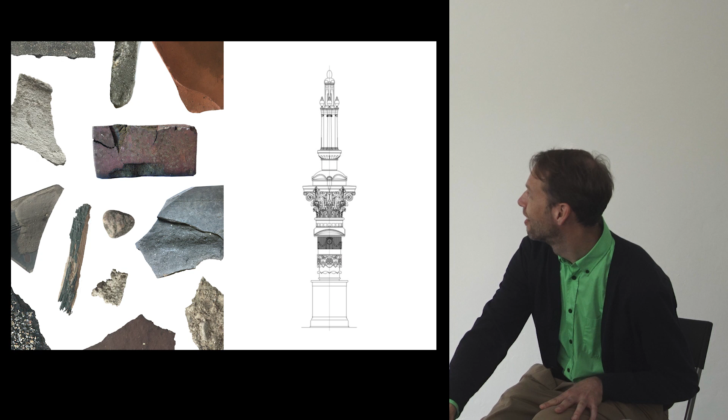And for us, that means... better carry on, is that the sign to move on? For us, it means that we need to be flexible in how we look at things and how we engage with things, and we need to be agile in how we condition the situations for our architecture.

For me, it means also to develop an attitude to enhance an empathy, a sympathy with the world around us, to engage with the world around us as a material and also as a renewable energy, and not in an esoteric genius loci way of finding spirits of a site, but dealing with the actual matter in a pragmatic and sustainable way. And people have been doing that for quite a long time already.

Maybe only since historicism in the 19th century came up, there was suddenly a shift between old and new. But before that, things were seemingly merging much more into each other. And people like John Soane, whose work we see here on the right, turned that into a real sophistication.

This is the pasticcio in John Soane's museum in London, which is made from found pieces, from things he collected, but also from new parts that he assembled together to a giant column and order of quite different things.

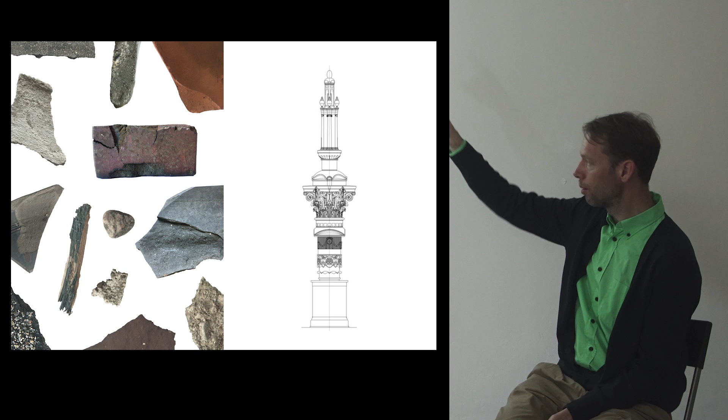I will come to that material later. This is the actual material of one project that we're doing in Garkau.

And there was a culture of accepting mistakes. And I think for us to engage, for all of us to engage with what is around us, that's one of the first steps to make, is to accept what is there, but maybe also to accept and to accomplish a mistake and something that is broken.

Composite orders also mean a social energy, something that sets free new space that can be occupied in different ways.

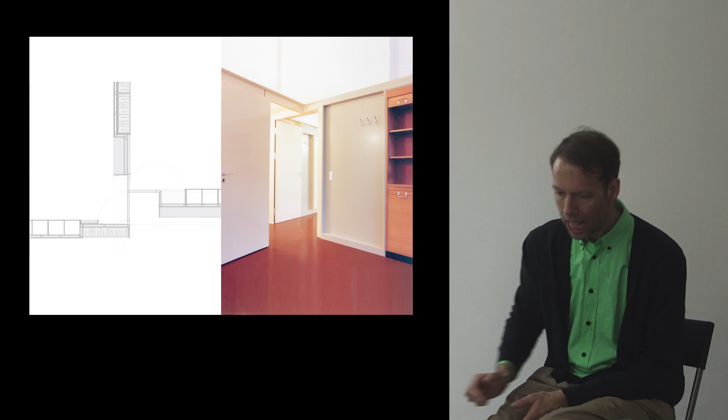And this is the first project that I have done as a student. That's now almost 20 years ago at the Art Academy in Hamburg. And in a way, it captures some of these ideas.

It's, do we have a pointer? Or? Sorry, yeah.

On the left in the plan, you see some cupboards, and those cupboards were collected from the school, from other places. The only thing that we designed is this knuckle at the center, which is a special door where 3 door leaves merge into one.

Those secretaries of those offices weren't best friends, so they didn't want an open office, but we tried to make it open as possible. So we have this door leaf that actually joins all 3 rooms together into one when the doors are open. That's the main thing that we designed, reaching out and embracing those found cupboards.

Around those themes, I want to show 5 projects, smaller and larger. Because teaching is an important part of the practice I'm running, the first one is a student project that is actually also quite old already, but it's still one of my ever favorite projects. I think it's from 2010.

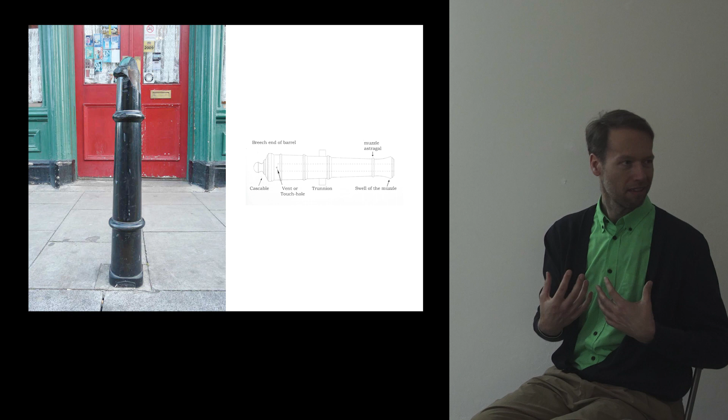It's when I was teaching in London at Kingston University, and the topic of that year was public house, which is basically about pubs. It's a connection that I didn't know or became only aware in London, that pub actually means public house. So it's a public space, it's a public living room, because flats are small in London.

People meet in the public house, and that's where they have parties, that's where they have dinner, that's where they drink beer. They wouldn't do that at home as much as we do it here on the continent. That's why the public houses are a real social condenser.

At that time, the smoking ban was introduced in London. So we asked the students to design small armatures in the public space in front of the pub to bring the life out on the streets.

One of them, Lydia Grinko and Minsu Kim, they found this bollard. This bollard is on the pavement in front of the entrance door, and it's in itself already a really interesting piece of transformation, because in its former life it was a cannon used in the war. It has then turned upside down and was introduced to avoid cars hitting people.

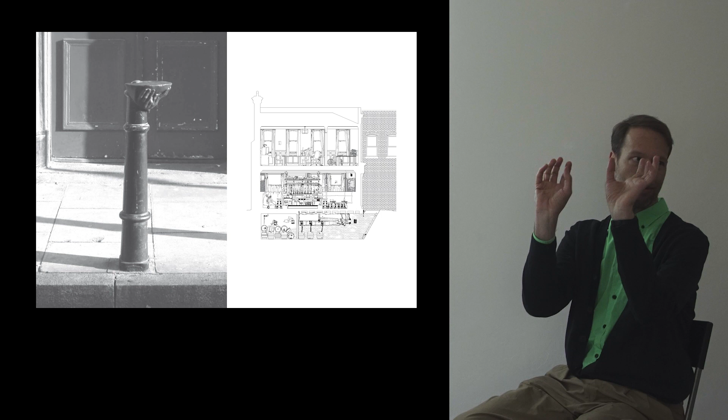So it has a quite nice second life, and now the students came and gave it a third life because they noticed this broken head and they wanted to repair that, but also turn it into something new. To engage with the furniture inside the pub, they made a negative of the top of the bollard, and made a counterpiece. Here we see the bottom of that counterpiece that was then to be inserted onto the bollard. When it's finished, it looks like that, and it actually makes a little table held up with the students' hands that they've also casted from their real hands.

So it's also a hint to Greek caryatides, but actually all done in English steel cast iron. I think it's a very meaningful but also thoughtful piece of how to make something sustainable, but also something festive and something sociable with what we find in the city.

At the moment, we are working on a project that has been growing more and more over time. It started quite small, and it's now turning to become a little village on the countryside where we're repairing and transforming things. I call it Repairing Häring. Häring is the name of the architect, Hugo Häring. This is him on the left.

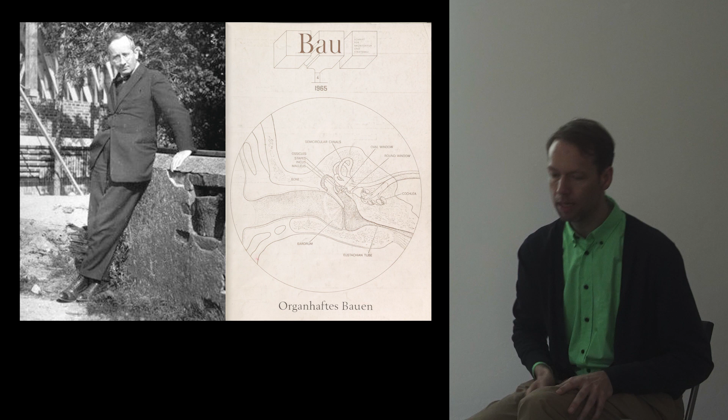Hugo Häring is one of the superstars of the 1920s in Berlin, together with Mies van der Rohe and Taut. He was sharing the studio with Mies van der Rohe. But his ideas were quite particular, I would call it, and maybe not always so popular, especially with Le Corbusier.

He had big fights with the CIAM congresses and with Le Corbusier, and at the end he was pushed out. That maybe wasn't so useful for his career, but indirectly he influenced the world's architecture quite a lot, because he was interested in organhaftes Bauen, and it's in the 1920s, a quite early way of thinking of architecture as a body.

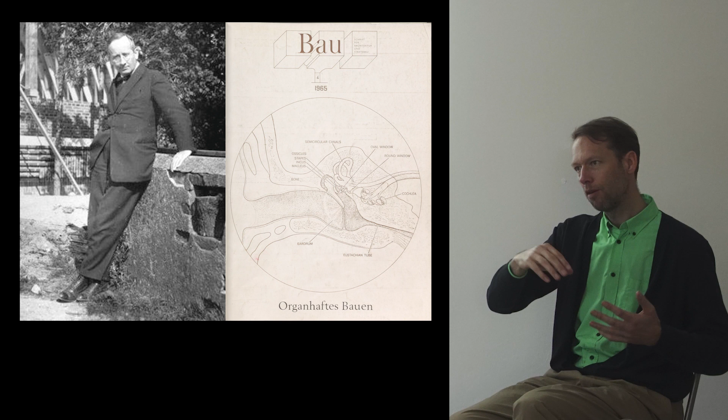The idea is that his buildings work as conglomerates of things. There's one main space at the center, and secondary spaces are grouped around it. The building grows from within, like the body, and those things hang together, connected by the program linking them.

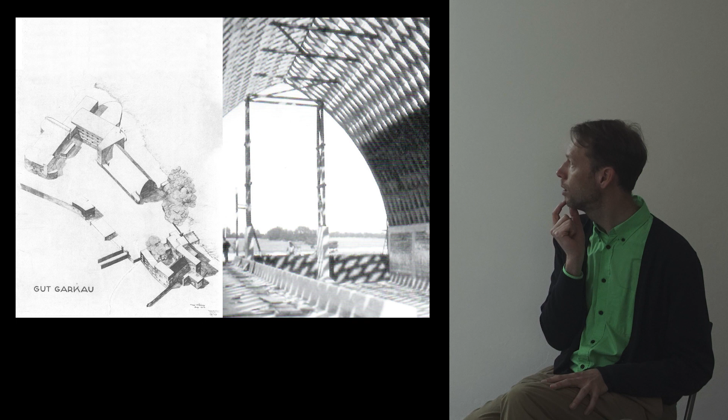This is the farm that we designed, and this is the ground we are working on at the moment. On the left we see the farmhouse, this is the barn, this is the horse stable, this is the cow shed we just saw, and this is for the wagons. The whole thing makes one loop—all these functions are connected, like a bracelet, leading from one to the other.

He was taking functionalism quite seriously, and shapes were bouncing out where they needed to be. On a farm there's also space to do that, and one can do it quite radically because there are no planning regulations—he could just go up and down as the functions needed. On the right we see the barn he built with the lamella roof, a patent by a German engineer that came out just two years before. This is actually one of the largest examples ever built.

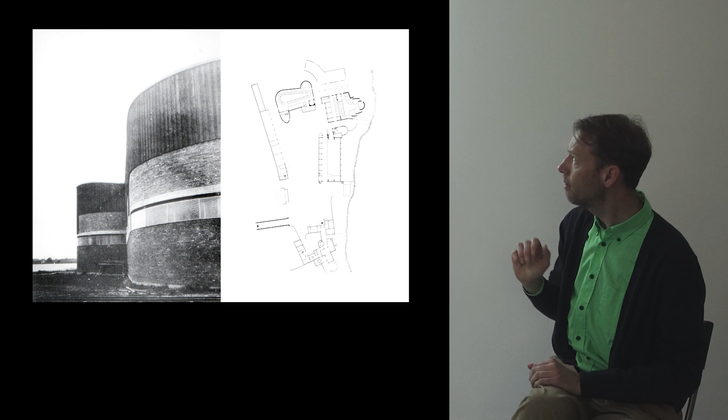This is the cowshed from the 1920s, only a few years after it was finished—this is an original photo. Today this looks maybe more common, but at the time, in the 20s, when many buildings were plastered in creamy white and smoothened, this was a very radical approach: keeping the timber untreated, really patchy, the brick the same. The concrete is not painted, and the glass is raw glass with extremely thin sheets just hanging on the brick. So one could say this is one of the first really brutalist buildings, giving the material the expression it actually has from the construction.

This is another photo from the 1920s with the plan and the section above. The idea was that one person could treat 42 cows. Hugo Häring perceived this cowshed like a machine, connected to farming ideas from the US at the time.

I'll soon be finished with the history part. But it's important to see what those buildings looked like, because we've now been asked to repair them, and repairing them is not about reconstruction. It's about making them with the attitude of Hugo Häring, with the means we have today, to give them longevity and make them last as long as possible.

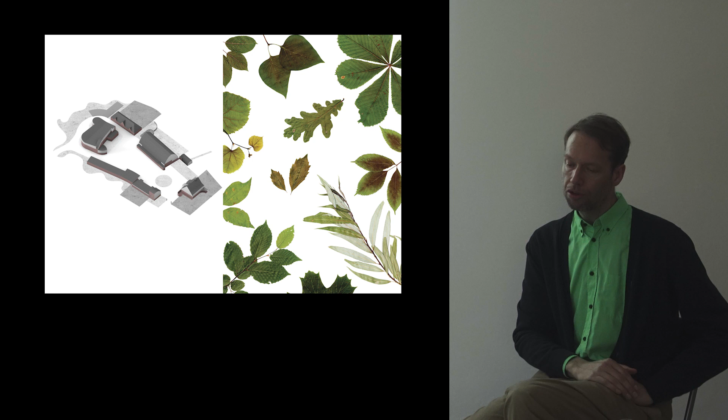We are also surveying the landscaping, the plants around the farm, because we need those gray zones around the buildings to make a buffer to the wildlife and to the village, but also to enable private and public use. It's often seen as a problem that things aren't clearly defined as private or public, but in our case, we see it as a potential that those things are actually folded into each other.

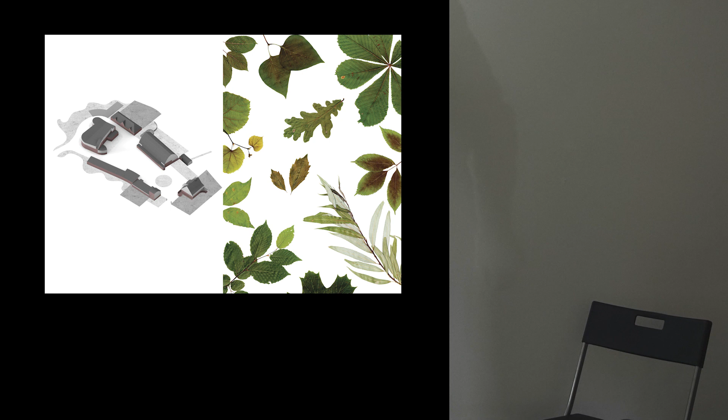So we have housing here, here, and here. We have workshops here and here. We have garages — this will be for temporary public use, this will be for larger events and festivals, and there will be supporting satellite uses around the farm.

It was very important for Häring to connect it to the fields outside, and it's actually quite nice how it sits there in the greenery with this patchy appearance of brick and timber, all aged. We didn't want to replace that yet, so we've been repairing the timber cladding because it's quite nice how it sits there with the foliage.

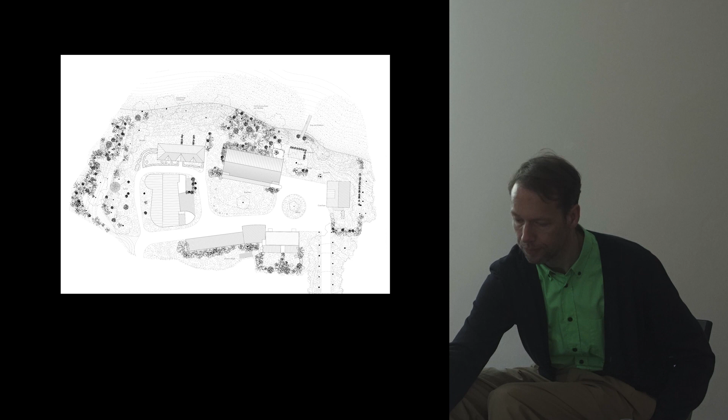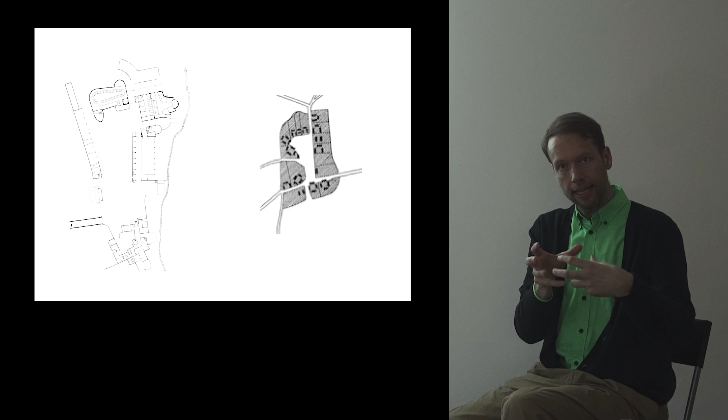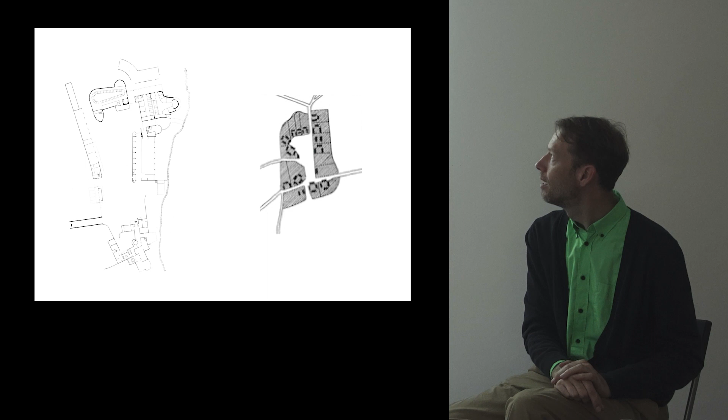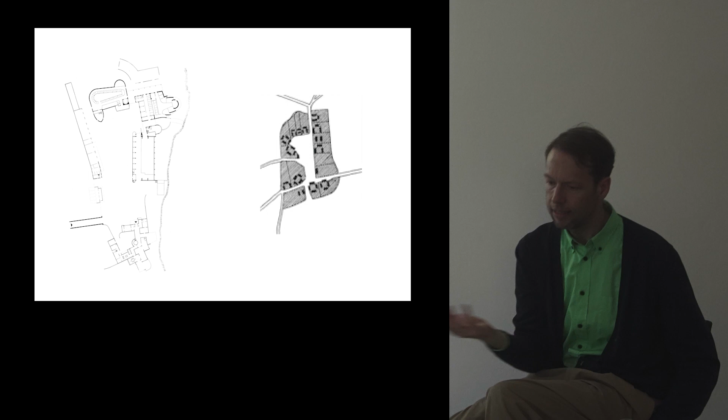This inside space is quite important because it acts like a village square, and it's just that open quality of an empty center that is able to allow many different users around it, be it private or public. That's why we like that connection between this village typology and also seeing the farm as a village. Ideally, in 10 years or so, it will be a little bit engaged like Bruegel's painting.

But what we try to foster is to make networks with local partners, but also with art schools, with architecture academies from Hamburg, from London, with music festivals. One of the biggest music festivals of Northern Europe will be using the barn. There will be music schools using the cowshed. We want production to happen there as well.

We ideally want to allow for some farming, even if it was only sheep. The idea is to have as many different things as possible, and that we do not fix this. Actually, this strategy is a problem when you want to gather money, but I think for the farm and for the place, it will be more sustainable.

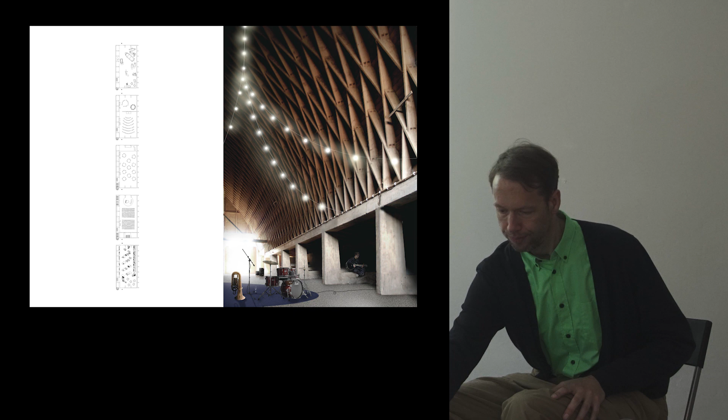So we did scenarios for reusing the barn, and of course that can happen with markets, as a concert space, as an event space, as a storage for boats in a very profane way. It can be used by schools for workshops, for temporary exhibitions, but mainly it's for summer public use.

And it's just now, since last year, that we've been starting to do the first repair works, and many of them are not very noticeable, and actually that's the aim of it. We enjoy not acting as an author and fully being absorbed with how Hugo Häring treated the spaces.

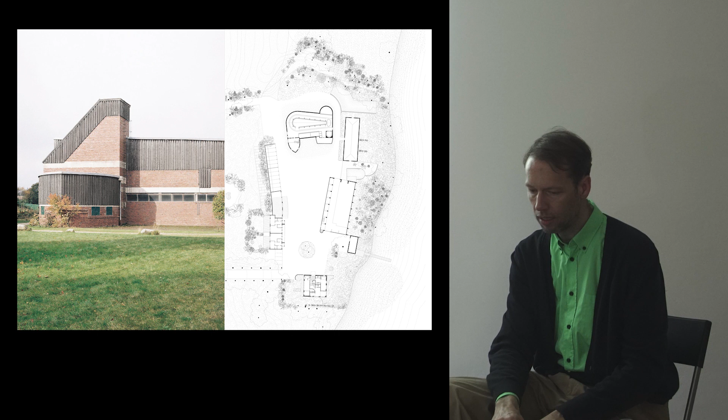So what we're doing is repairing the roof. We are sharpening lines, as in the image on the left. We have already repaired the cladding, the windows, and the eaves along the tower.

On this image on the left, we have now just replaced those windows with very thin timber frames and rippled glass, which wasn't so easy. Those frames had to be made from timber. We also wanted them only 25 mil thick, so they appear as slim as in Hugo Häring's original photos.

And this is the only metal that will also survive here near the Baltic Sea, because the air is so salty from the sea, so we could actually only use stainless steel. It's a material that is also untreated, in the same way as all of Hugo Häring's materials are untreated.

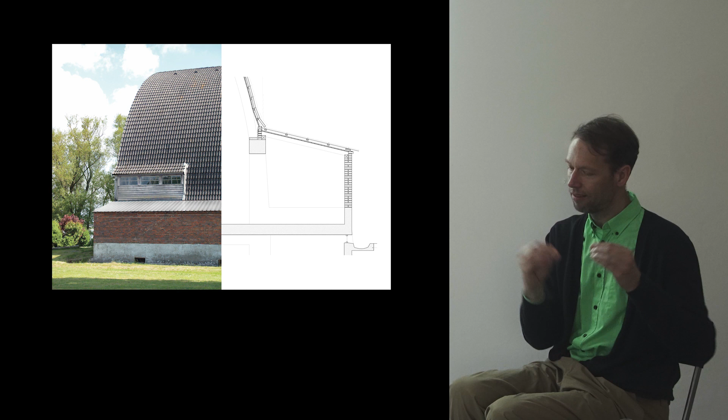But those are small things that take quite a lot of time finding those appropriate answers, because the interesting thing with those buildings is that one can build quite directly - everything you design, you see. There's no thermal bridging, and there's not much to this architecture. It's a lot about plasticity, but there are very few ingredients. So the few things one has to do them right, and we test that quite a lot before executing it.

This is a flat roof that we've been doing on the left side, again with those very thin edges. It's not that we pull the bitumen over the edges - we've water tightened the edge differently, and the bitumen actually stops, so you don't see it from below. On the right is the bottom of the new roof we just did on the barn, and now we'll be following the concrete repairs here, which will be demanding.

Those repair works depend on friends and partners, and we are reaching out, trying to find help on many different levels. A very nice group of helpers and friends is the Jugendbauhütte, which is an organization of a heritage committee in Germany. In every Bundesland in Germany, there's one of those groups. It's a place where people after high school can do a social year in architecture by repairing listed buildings. This is a very interesting way to make them engage, to train them also as craftsmen, but also to do something for a very large stock of buildings that are falling apart.

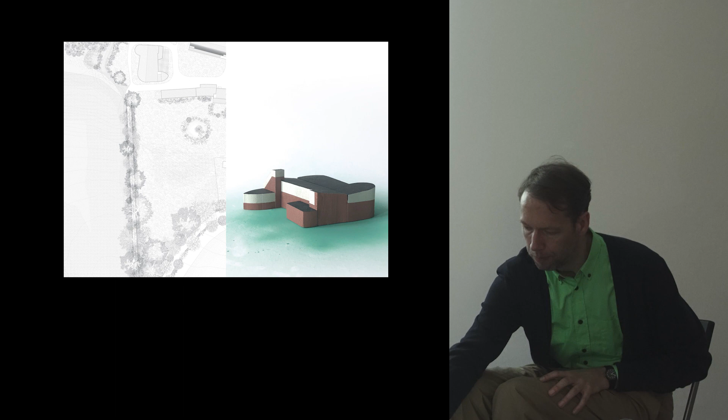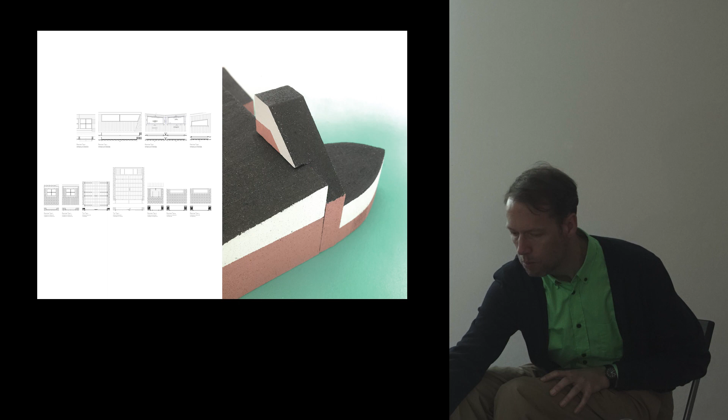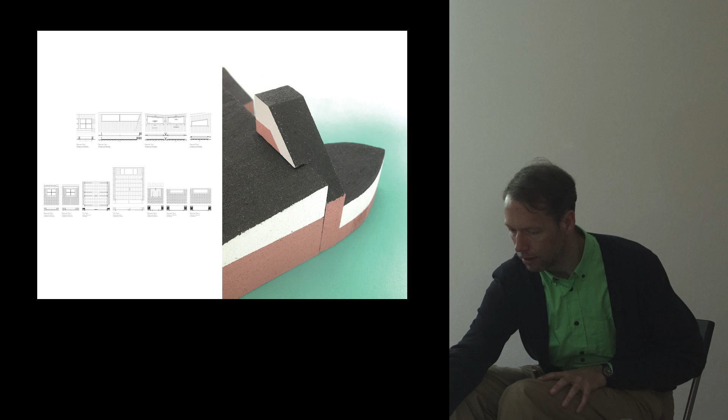I'm showing now a few more of the things we're doing. We're reinstating some of the trees that have been taken away over time. We are also trying to find our own language with models, trying to engage both with the plasticity of the buildings, but also with those very thin graphic layers of materials that he has used on the outside skin.

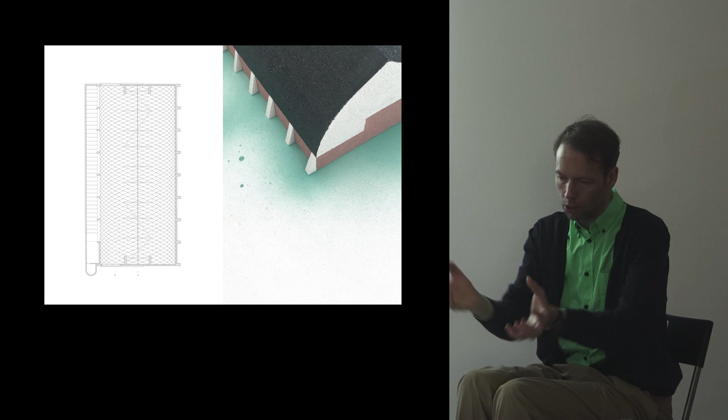We are surveying the different kinds of windows and doors that we will be repairing, so we have a very large book of drawings already, summarizing all parts of his buildings. It's important for us to work both in a very precise and defined scale of surveying, but also in a more open and imaginative space of our own modeling, trying to bring the buildings together.

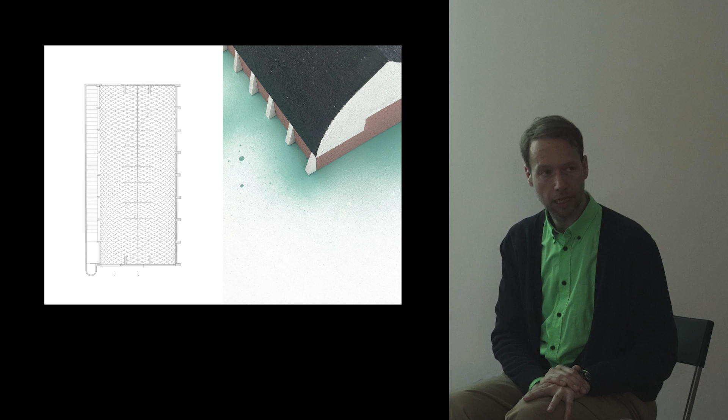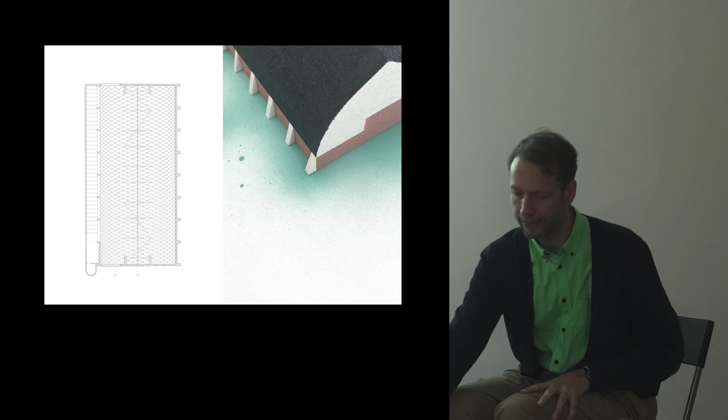This is a little folly that we're hoping to build. It's not a reconstruction, it's a building that appears here on Hugo Häring's drawings. It has never been built, but this is something that we will want to build as public toilets, as disabled people's toilets. It's a kind of reservoir and a catalyst that can take things that we cannot do in the barn. So it's our joker building that we interpret from Hugo Häring's drawings.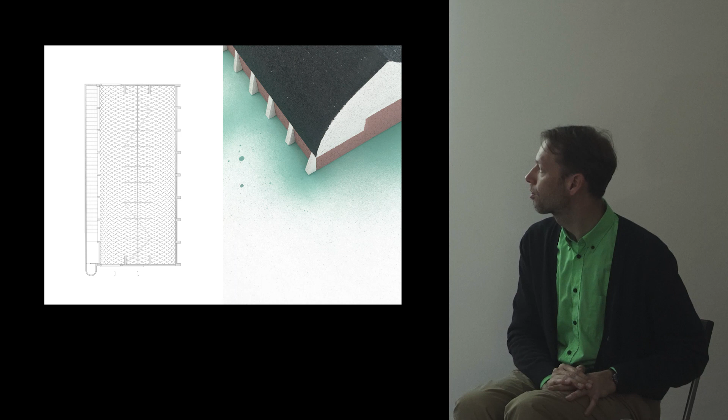And then there's this long animal, which is very useful because it's for lots of cars, it's for storage, and that allows us to keep the middle empty. Eventually there will also be a head building at the front as a workshop and for groups to have a heated space. It also has those columns that we make from composites of existing footings and new posts, timber posts on top that we connect with a steel armature to make a new composite column for the long car storage at the back.

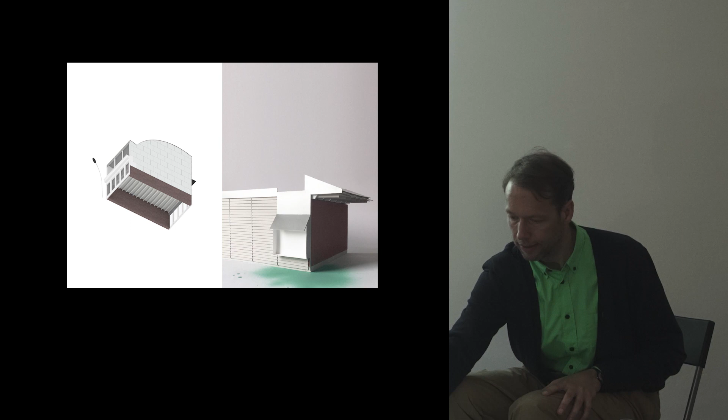Here on the left we see the building that is like a slice of the barn. It also has inside a lamella roof, and it's intended to be a workshop building for groups, a place where people can also stay over and spend time on the farm. On the right is the other end of that long stretch with a small box of public information and with photovoltaics inclined south, all meeting at that corner, trying to engage with the plasticity that Hugo Häring has in his buildings.

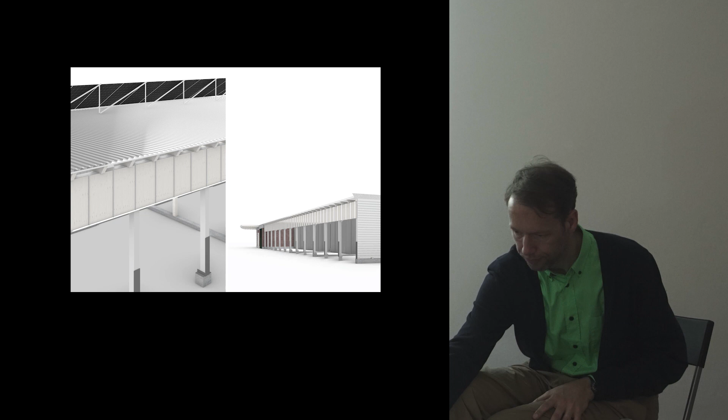On the same site, we're doing a little piece of housing. This is also in Garkau, just in our back. This is a promotion, which is recent, of housing 200 meters away from Garkau. It looks like a joke, but it's meant seriously. So lots of cars, no pavement, cycling on your own car park, but lots of green and brick houses. That's the message. But it's, of course, a huge waste of land and energy, and not very carefully planned.

That's why we are looking at using what is there in Garkau as an existing building. This is the ghost building that I haven't shown you. It's at the other end of the cowshed, a building that was originally built by the Nazis in the 30s, transformed again in the 70s, which you can probably sense, and now it's us transforming it again. First of all, we want to

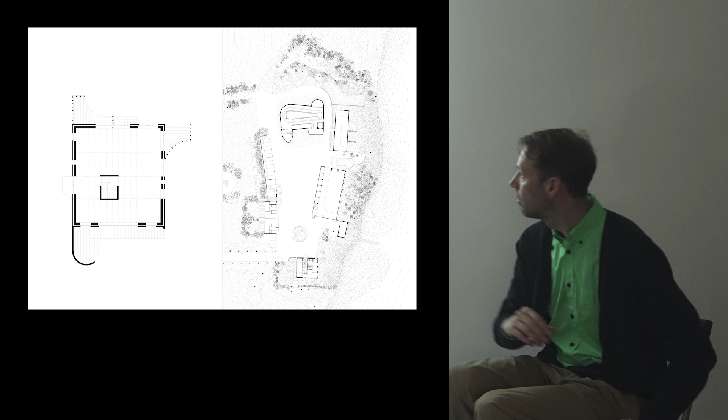Here you can see this house. So when you enter the site, the first thing you see is this enclosure that gives this private terrace a bit of protection, like an arm, and you don't look onto people's coffee table, but also it's a nice counterpoint to look along here.

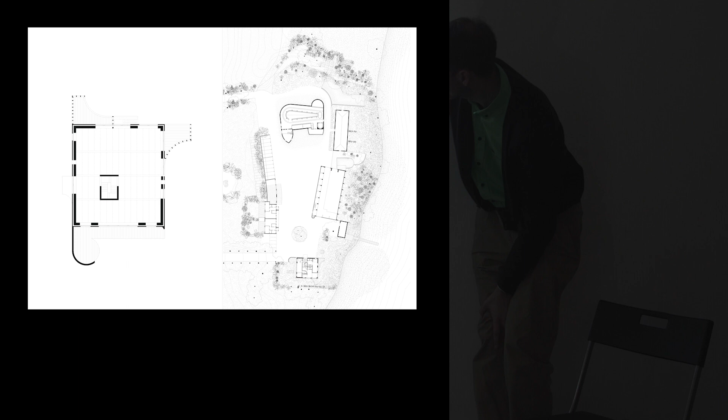Some of these forms may echo what is happening here, but overall we've been trying to push the building into the landscape in the same way as Häring did. We have, of course, looked at the houses that he designed, the ones he designed for Garkau. That was in the 20s, so that's quite remarkable. The house on the right almost looks like a farm in itself, but all of them bounce and push and pull and spread and interact heavily with the landscape.

Here on the left, other houses he did a few years later, quite radical in their approach at the time and not as dogmatic as the Bauhaus, much more free and open. On the right is our interpretation of it. On the outside there have been planning restrictions, but still we make dormers, little roofs and terraces to change and pull apart the volume of the building.

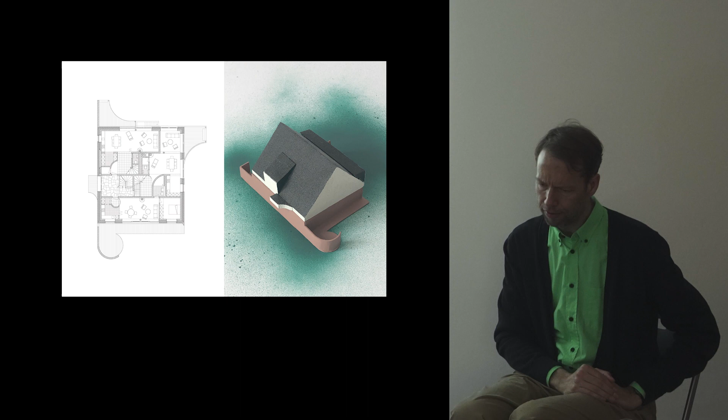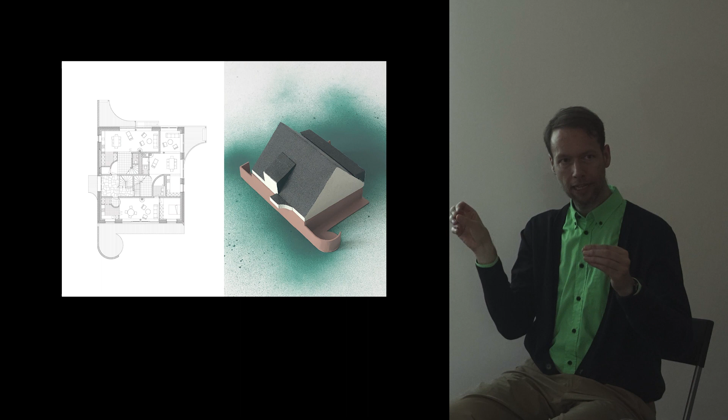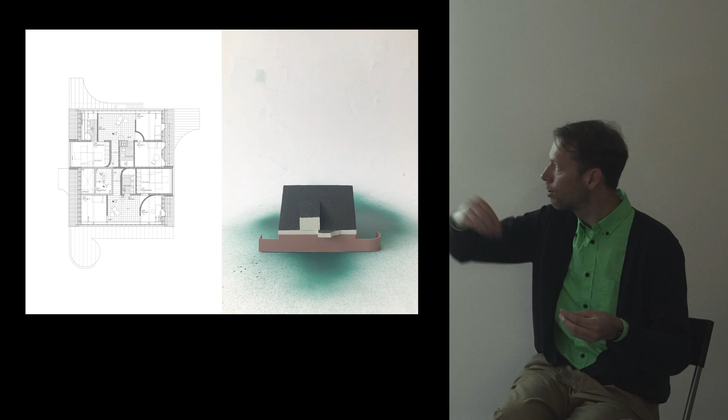On the left is the plan of the ground floor, which in a way acts like a body folding all 3 flats on the ground floor into each other. After working on it for a long time, it was interesting to find that working with those curves actually saves space. It's a means of efficiency, because our intention was to bring 3 flats down onto the ground with their own terrace but also a common entrance. There wasn't a lot of flexibility, and using the curves helps to come around the corner and make those flats work, which wouldn't work so easily with right angles.

So that works like this. This is the entrance for the whole house. We have one entrance turning towards the big courtyard of the whole farm, where everyone enters. It's a shared entrance that is festive, big, generous and high. It's a tall space that goes under the roof. And from there we have 1, 2 and 3 flats.

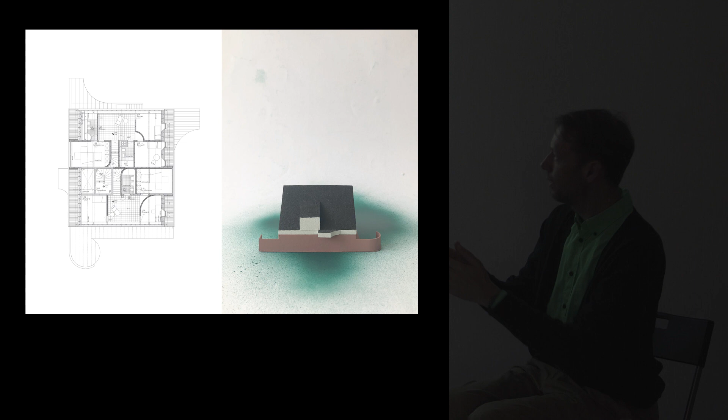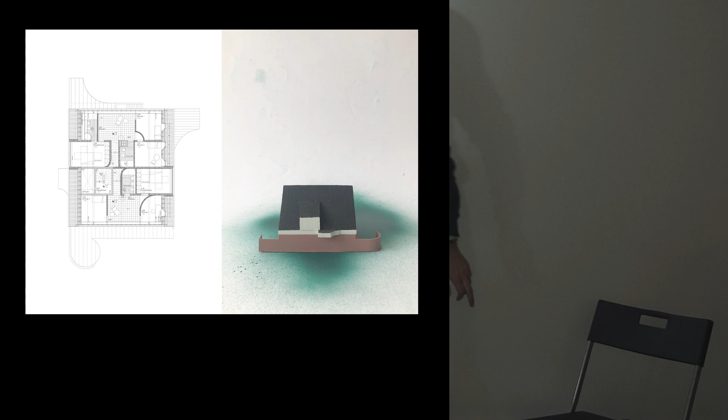This is a single-story flat. These have their own stairs, so you go up here onto the next floor. Then there's a 3rd stair which goes under the roof and accesses 2 more units. This is the floor plan of the upper floor, so here there are the 2 maisonette plans. There's 1 guest room in the corner here, used for guests of the farm who want to stay over. On the floor above there's a big attic space, which is another flat.

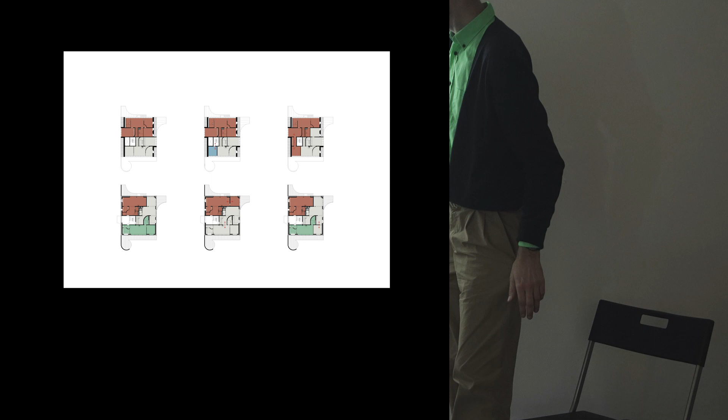So overall it's 5 under 1 roof. Because we have divided the space into those 4 bays, it's quite easy to connect the flats or not, to make them grow, change over time, and allow for flexibility between the units.

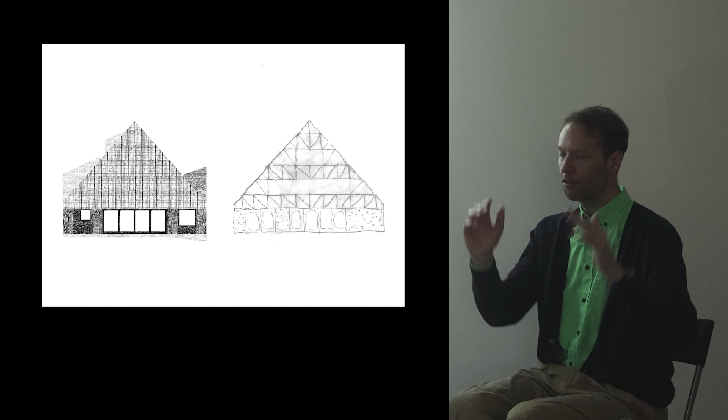And this is a very nice drawing made from drawings by Hugo Häring, but Miroslav knows that quite well, he has seen that drawing before. Our idea was to make large gables for the house, as is usually the case in the countryside with barns and agricultural buildings, one gable held together by an overarching structure.

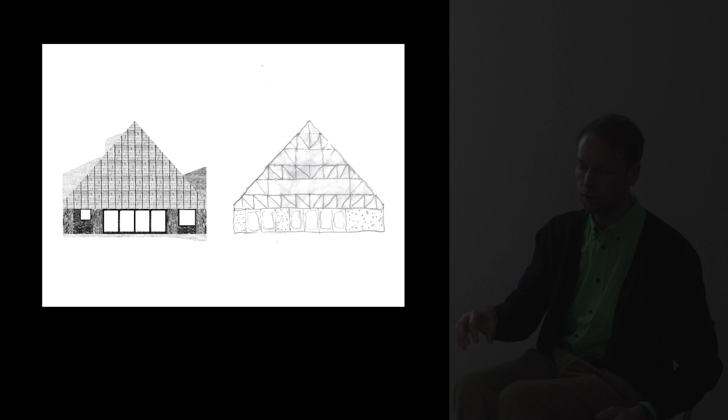On the left is the facade idea, and on the right is the structural idea of the gable. Because we have big openings, we have timber trusses spanning across the whole length over the openings on the ground floor, held up only at the corners. So it's one big system of a timber framework resting on this brick ground floor.

And this is sort of what it will look like in a more defined way. It also has a stainless steel cladding, a long-lasting material that reflects the trees and surroundings and resonates with the glass of the window bands above.

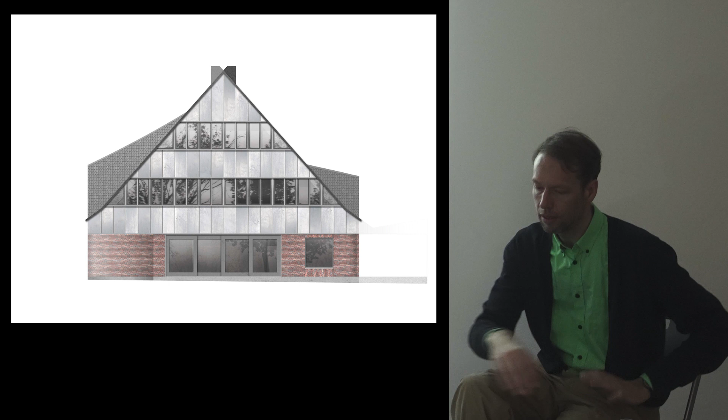Here you can see the timber structure sitting on the plinth of the ground floor with the matrix of the room. So the whole ground floor is made from brick and everything above is put onto it in timber.

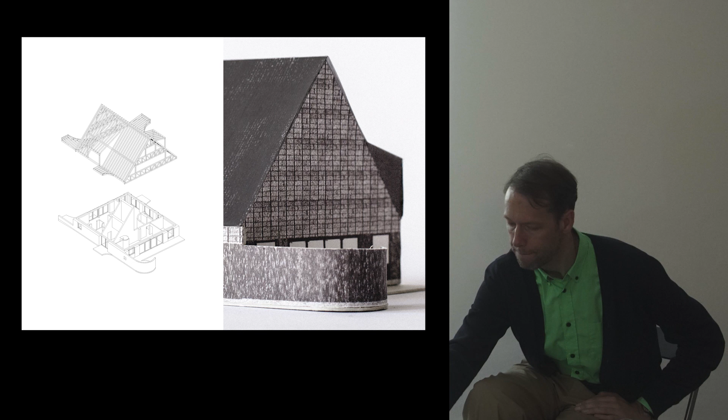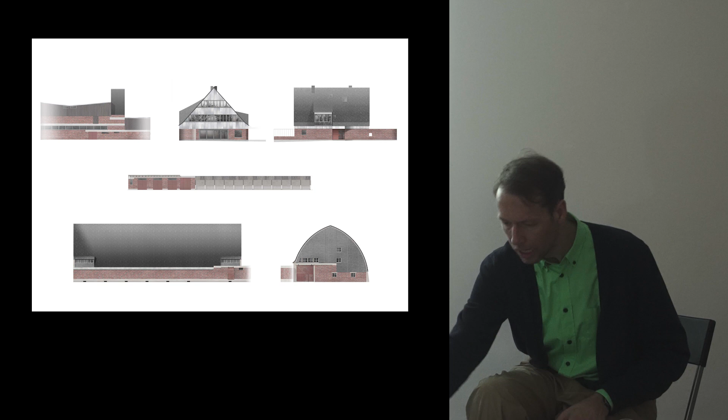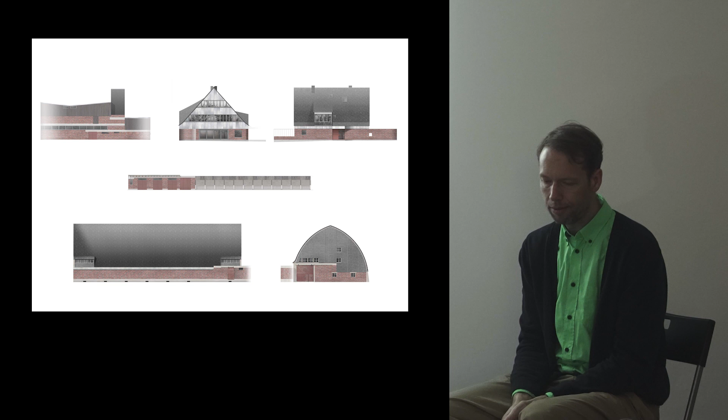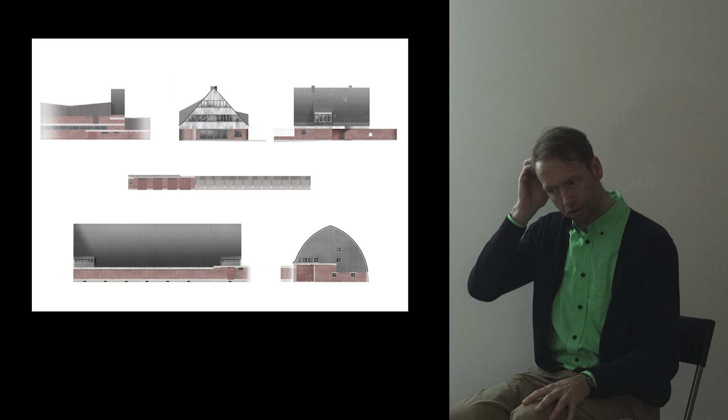So overall in Garkau we have those quite different but also fairly similar buildings, and even the ones of Hugo Häring, all of them except the house, are quite different. They're long and low, they are high and bulging, they are flat and horizontal, and for us it's interesting to find what is connecting them, that there's a certain balance, because repairing actually means putting things into balance, putting them in parity, from reparare, Latin. So it's not about making everything perfect or the same, but bringing it into a healthy equilibrium.

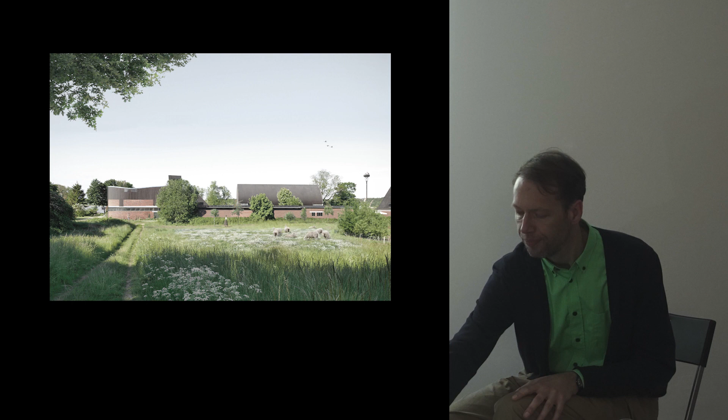And hopefully one day there will also be sheep.

I'm showing those two projects more quickly. This one is called Collective Conditions, near Bonn, the former capital of Germany, in a quite ordinary Western German street. That's what villages look like there.

The building we've been approached for is the grey one, which had been done by another architect who was not invited anymore to continue further. But it's a fairly recent structure that we wanted to connect to and took very seriously.

The task was set by his company, Lindler. Those are the Lindlers on the left, that's their team, and they have a heating company. So they plan, sell, and install heating, photovoltaics, hydro energy, and anything around those topics.

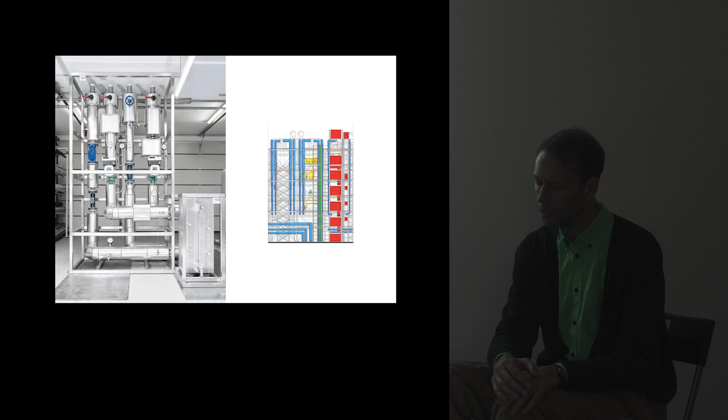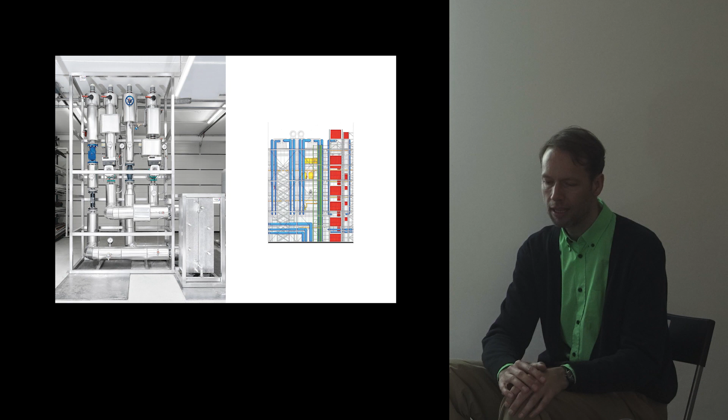The other interesting thing was the topic of that company, which is very technical and about heating and construction. So we thought it's good to use that as architecture too, expressing that technicality, building with technical systems of steel and prefabricated pieces—maybe something like architecture parlante, expressing technicality like Piano and Rogers' Centre Pompidou does. But here there's a real reason for it, because it's part of the program.

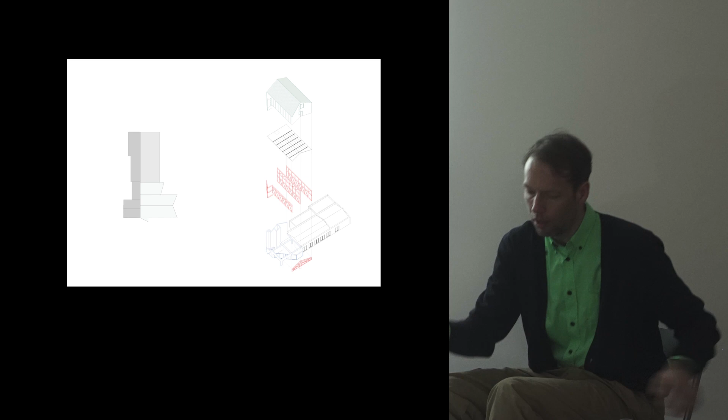On the left we see that composite again of different parts meeting together, and on the right the tectonic structure: the base on the ground floor with the grey building, a wing column with a space frame steel structure, three steel girders defining the structural axis on those lines, and then prefabricated ceiling elements as floors and a facade cladding everything together.

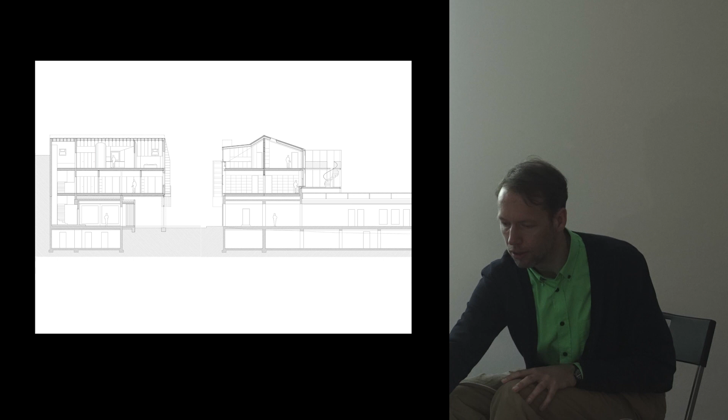At the end, the building looks like that. It has this heterogeneous base with the entrance where you go up the stair. These are the shops, and that's what is already existing—the grey building we saw earlier. This is the column with a space frame structure holding up a large gable that we see here.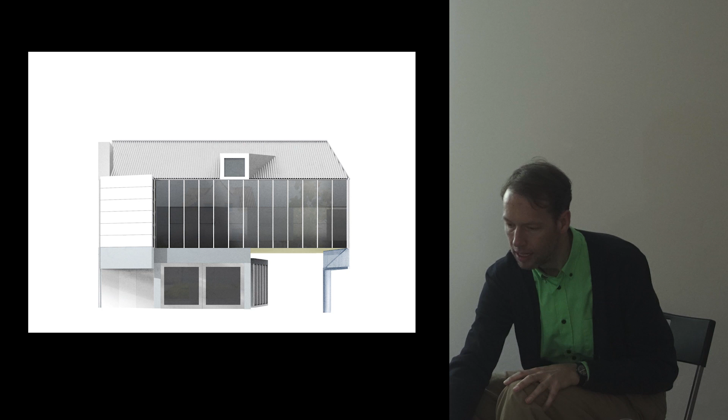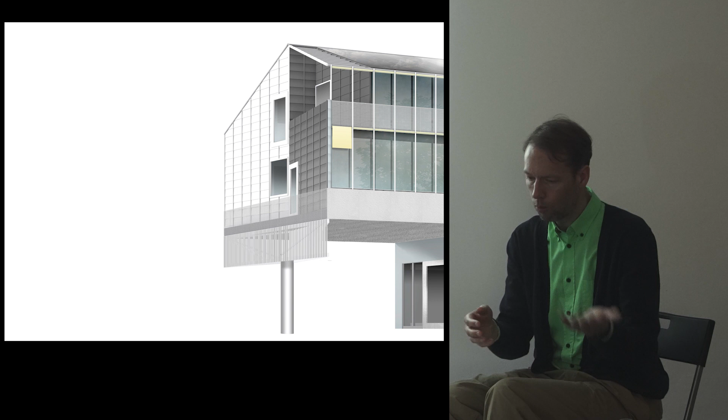The gable has to be kinked for planning laws, so we've been pushing out the corners to make the floor plan bigger and generate more square meters. Because it has this middle axis, we enjoyed that the building has two halves—a white half and a black half, two different sides—all held together by this one column underneath.

Having those lines here and those center lines allows us to have a simple steel frame, and we can therefore have this plan libre for the housing. Those are two flats, one here and one there. And again, the structure allows us to bounce the spaces for living around those constraints.

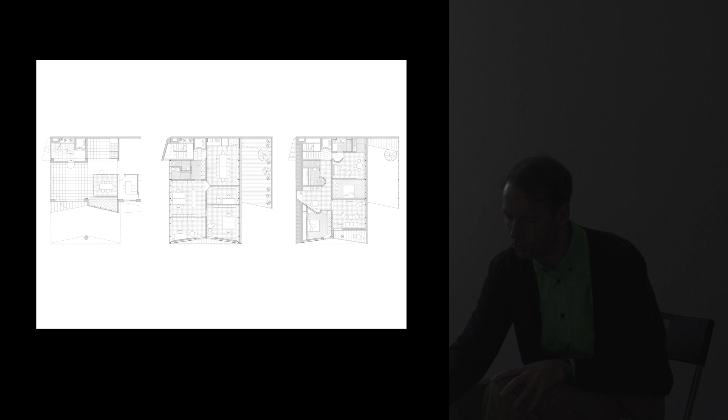Here I make a dormer, and the bedroom just tucks under the sloping roof. It's all very tight, but using those contractions and splayed forms allows us to bring as much room as possible under that volume.

And so overall, this is the structure that we designed, and it would allow different kinds of office layouts, but also in the future different kinds of flat layouts if that's required.

And this is the space made from steel and plasterboard, bending and curving along.

You want to take that?

The project has been fully detailed. It's finished and was meant to go on site one year ago, but then with the cost explosions because of the Ukrainian conflict, it stopped for now. So it's in the drawer, but hopefully it will be continued soon.

So the last project is das Englische Haus. And das Englische Haus is another composite, but it's also the book by Hermann Muthesius, which for me was quite important because I've lived 11 years in London. And I guess many of the ideas that I've been showing today are also based on this arts and crafts book.

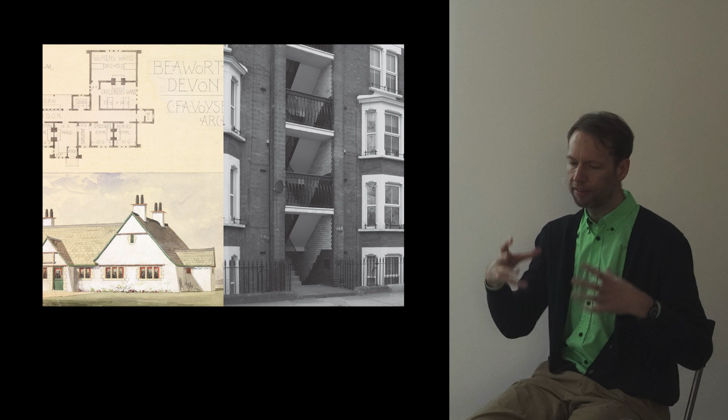This is actually my window. This is their photograph. And the quality they like is, of course, that bay window where the living room becomes part of the street, and you feel like you're sitting halfway on the street. But mainly also those common stairs and public stairs accessing the flats, but also being open to the street, are very special.

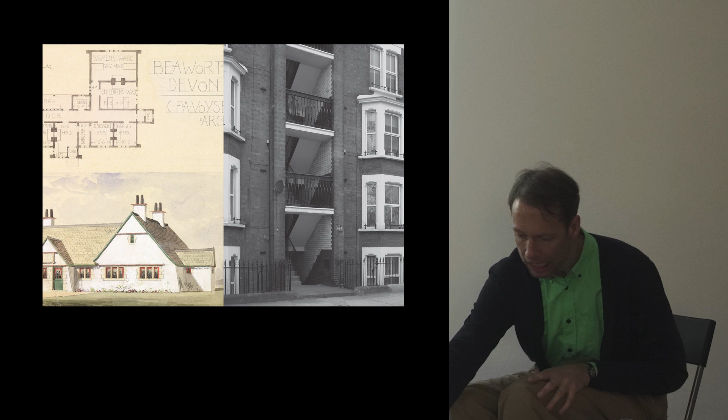And when you go up, sometimes you see people there, it's a bit like a human theater, so they always feel lively and active because they engage with the pavement and with how the pavement meets a vertical stair. So those things we try to weave into our project, and this project is on a site - it's this one here, and this is already our project from above.

What we tried here is to connect to those existing roofs of the listed building, many small pitched roofs making a picturesque composition of tiny roofs. And we sort of made a back wing for that front building, almost a mews house, again with a composition of roofs. And it's not so clear if it's one building, or two buildings connected, or three buildings connecting with the building at the head.

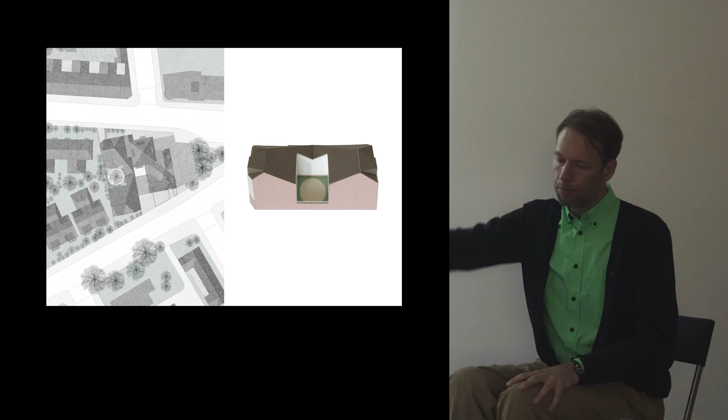Here one can see that again - this is the existing building with its loose constellation of roofs, and this is the one where we had to be a bit more organized, also because we wanted to create a large courtyard at the center. Those streets here are extremely noisy, so noisy that it's almost impossible sometimes to cross them because there's really heavy traffic.

So the courtyard is the one thing that gives a dignified way to enter the flats, but also a calm space for all the bedrooms to be surrounded so they can get quiet and fresh air. And you can see also from the density that we've been asked by the client to bring as many flats as possible onto this site.

We started with 10. At the end, we lost 2, which was good. And now it's 8, but it's still a big footprint.

But the one thing we did was push the roof down at the center so that light comes deep into that courtyard. And so overall, even though we have density, those flats are very well lit. I think that's always interesting when the client is pushing, because you really have to find the limits of your design, where it slips and becomes bad or overloaded, or where you're forced to apply some sort of trick to turn density into a quality.

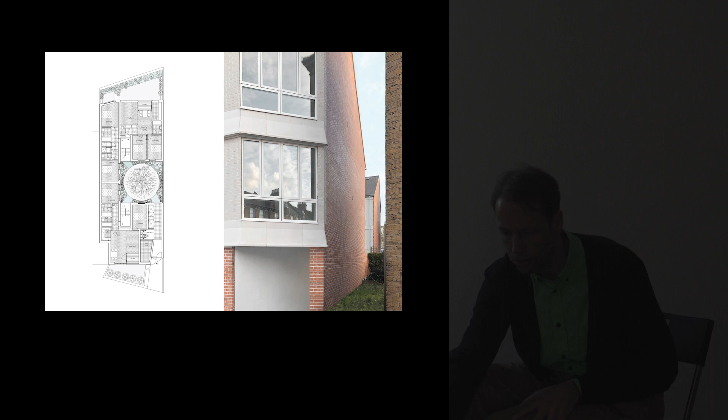This is the ground floor you see on the left with the entrance. You enter here from the street through a big opening, a longer passage into the courtyard. From there, we have those open stairs, not open to the street, but still open to a shared, planted courtyard. You enter all the flats.

There are 8 overall. An important quality of the flats, but also of an English house, is that the flat is house-like. We wanted to make it more house-like by giving as many of them a roof as possible, so 2/3 of the 8 flats actually have a little roof.

Sometimes it's smaller, sometimes it's bigger, but most of them have a roof, and they have their own entrance door from the outside. So there's no corridor or lift or lobby. The access is very direct, as if it was a bit your own house in the countryside.

And for that, of course, the garden is very important. On the left is one by Gertrude Jekyll. We're not there yet, but on the right is our garden. And this is the view peeking in from the passage into the courtyard space.

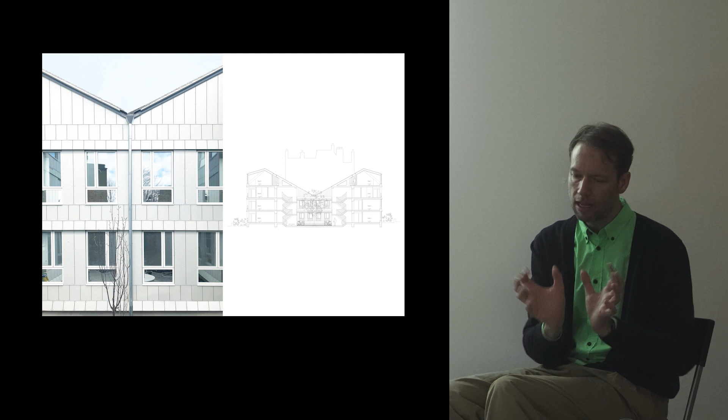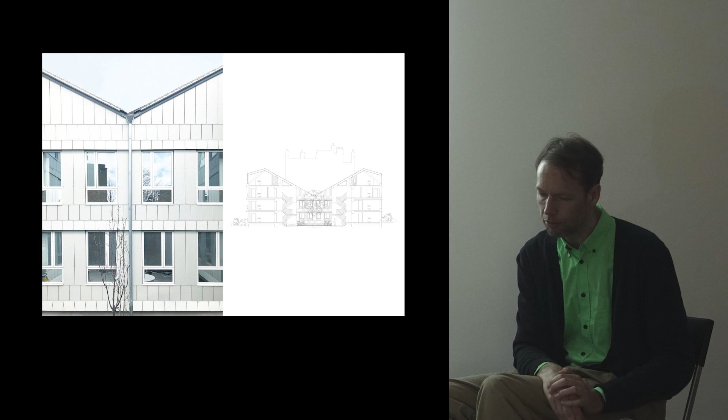The courtyard itself is clad with thin, paper-like sheets of fiber cement. It's a very cheap project, so that was also an economical idea, but it was also meant to make the courtyard more leafy and give it a lightness, because the space is not so big.

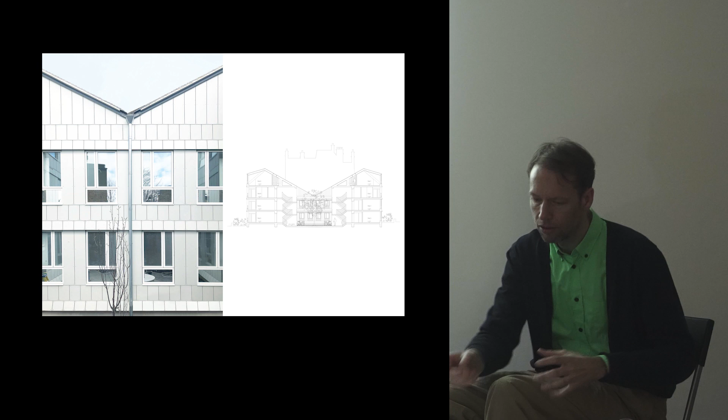And because the space is not so big, the planners had a concern about overlooking. We've approached that concern by using a special kind of glass - each window has 3 different pieces of glass. This one is clear, this one is opaque, and this one at the bottom is mirror glass, so it's spy glass - you can't look down and directly into each flat. Every view is a bit obscured; you can only look out, but you can't look in.

It's actually acting like a real mirror, which is quite nice now that the trees are bigger, reflecting everything around it. You can see that here too, where there's this mirror piece in the window. The tree is now a little bigger, but the courtyard at the center has a real room-like quality, and that's something we were after. It's not so tall, not so big - it's maybe not a courtyard, more a room. I think that makes it interesting.

And a very big presence on the courtyard is those large stairs opening up to the public space.

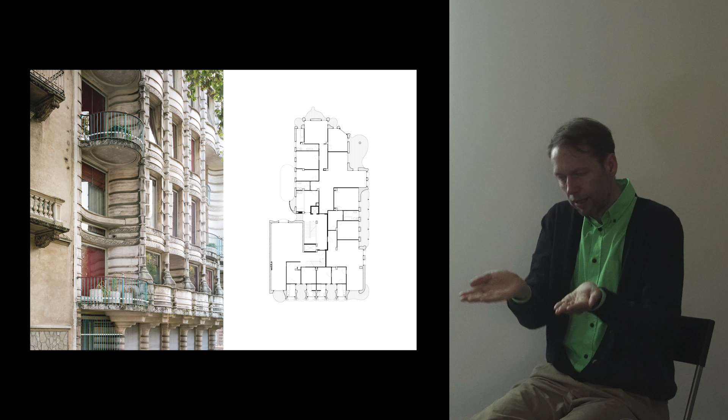This is surely a formal interest of theirs, but it's also the start of their strategy to make the floor plate bigger. On the left, on the ground floor, the building is smaller, and it goes out on the upper floors with those stalactite columns. The buildings always increase the floor plate as they go up.

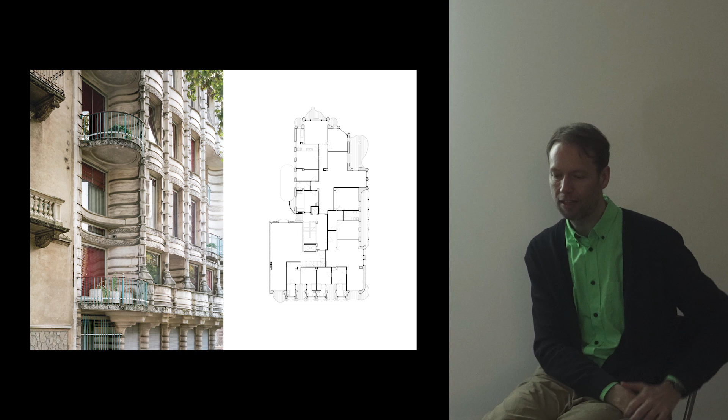It was also a strategy for them to obscure how many flats are in the building, because it's so complex and has so much plasticity that planners found it impossible to grasp how big it was going to be, since the drawings moved forward and backward and were very diffused. The house at the time was called the House of Butter because it looks so liquid. In the end, they tricked the planners and were able to build one and a half floors more than the building regulation plan allowed. This is one other social and economic outcome of those Baroque strategies.

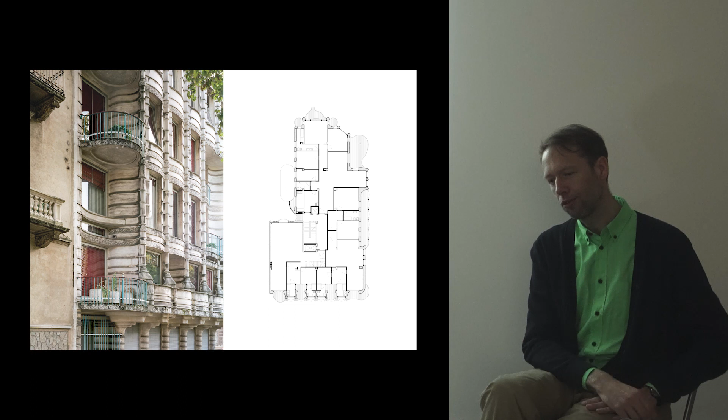They're using those constraints to turn planning regulations into plasticity and circulation, like they did here on the courtyard side.

This is the third example I'm showing. In this book we're doing, almost finished but not yet, there will be twelve houses they executed over twenty years, and they're all completely different. This is a quality we really embrace and that I very much admire. There are some similarities and common interests, but each house is completely different from the others.